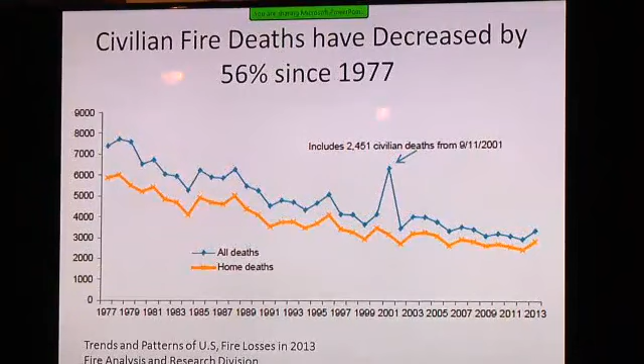What you see on the yellow line on the bottom is where people die in fire. They typically don't die in fires at work, don't typically die in fires when shopping, don't typically die in fires on vacation at a hotel. They typically die in the place where they should feel safest, in their own home. That's where the majority of fire deaths have occurred over time and continue to occur. In fact, it's becoming a larger percentage of all fire deaths as time goes on. So that's really a big focus for us in terms of improving fire safety in the home.

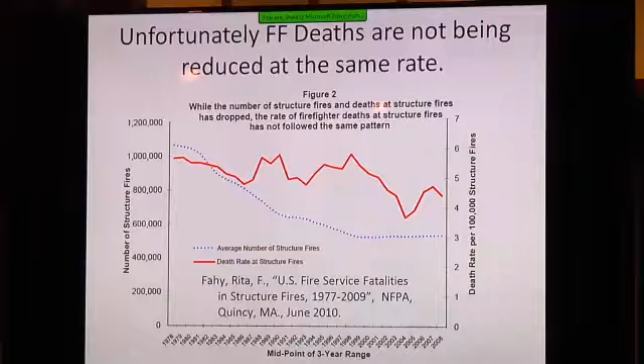Now, we've seen all these curves that are just on a nice reduction, so things are going along fine, but there's one curve that's not reducing at the same rate, and that's firefighter deaths on the fire ground. As you can see, that curve is bucking the trend, and it's a very disturbing trend. According to Dr. Fahy at NFPA, in the late 2000s, firefighters due to traumatic injuries on the fire ground are dying at a rate of 3 deaths per 100,000 fires.

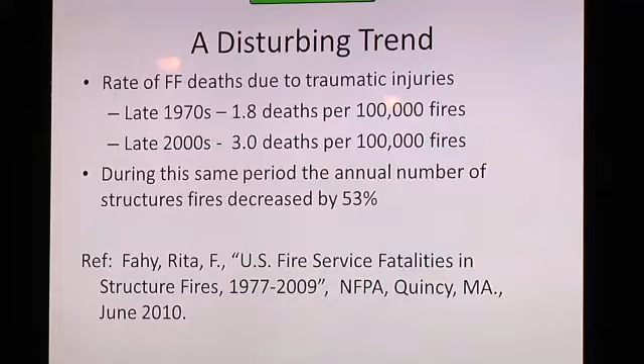Where in the late 70s, when they had less protective equipment and potentially less training, the death rate was lower.

Unfortunately, they also wear very big and heavy boots.

Unfortunately, when you start to put on 30 pounds of gear and carry tools which may add another 10 or 20 pounds to the load, it can affect your balance, your stability, and your ability to crawl around and move. Also, with the SCBA, it may limit your vision as well.

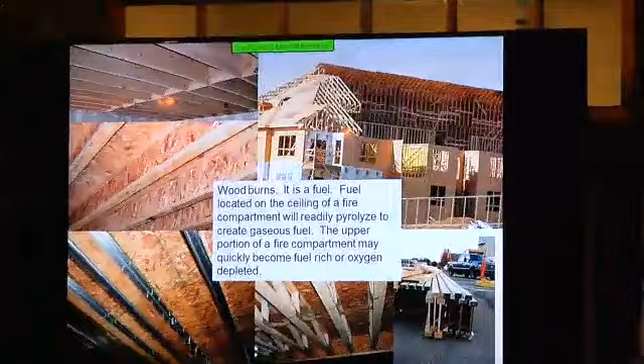The challenge is they don't sprinkler the entire building. So all that attic area that you see in the upper right-hand corner there would have no sprinklers in it. It would be a mechanical space. And we just had an example of what happens with that about a month ago in New Jersey when they burned down a large condominium complex. Once the fire got up in the attic, there's no way the firefighters can stop it.

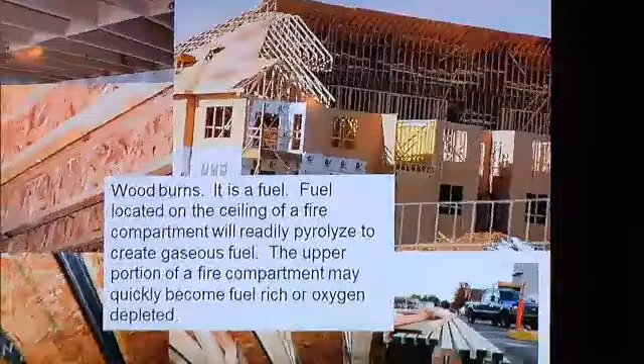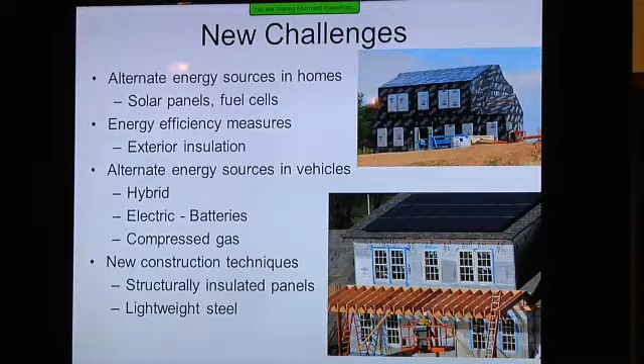And firefighters are getting additional challenges every day. More people are putting solar panels on their roof. They're getting fuel cells in their home. We have all sorts of different power sources for vehicles nowadays, hybrid vehicles, batteries, compressed gas. I understand the hydrogen car is coming, so we'll see. And that can be very exciting as well from a fire perspective.

So in summary, to look at some of the data from our brothers in the Census Bureau, houses in the United States have gotten quite a bit larger on average from the 70s to the 2000s. The housing lots are getting smaller, so these bigger houses are getting closer together. Again, bad news for fire development. During the past 50 years, the fuel loads in our homes have changed dramatically.

They've gone from being where our furniture was principally made of cotton and steel springs, and you needed the steel springs in the cushions because the cotton would kind of bat down. Cotton will smolder. It's fairly easy to ignite, but it burns slowly. Polyurethane foam, which has replaced cotton as the principal foam plastic in our furniture, is extremely resilient. It makes a great seating material. It's hypoallergenic in a sense. So it's a good material until it catches fire.

And then when it catches fire, it has a much higher heat of combustion than the natural materials. It burns with a high amount of soot, so it's a very dirty fire, and it results in fuel-rich conditions within the home very, very quickly. This kind of burning, in simple terms, we say it burns hotter and faster. So what that means is for occupants, you have much less safe time to get out after you hear your smoke alarm. And of course, if you don't have a smoke alarm, you're doomed. As we mentioned, the home designs as well have changed.

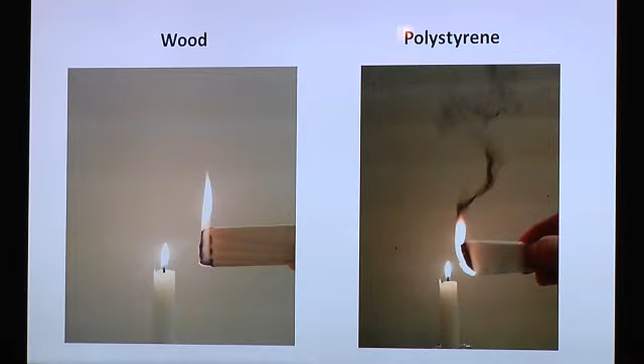Fuels are very different today. If you take a piece of wood and ignite it with a candle, you see that it burns fairly clean and that the flame spread on the wood will be slow relative to, say, a piece of expanded polystyrene where you can see it's a very sooty flame, a very dirty flame, and the flame spread will be very quick.

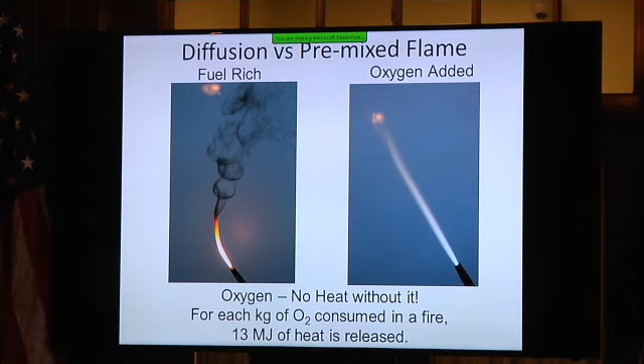So one finding that was developed at NIST in the early 80s was this idea of how much oxygen it takes to generate a certain amount of heat, that it became a constant. It didn't matter if we were burning acetylene or gasoline or cardboard. On average, for every kilogram of oxygen that's consumed, you generate 13 megajoules of heat. So basically, no oxygen, no heat.

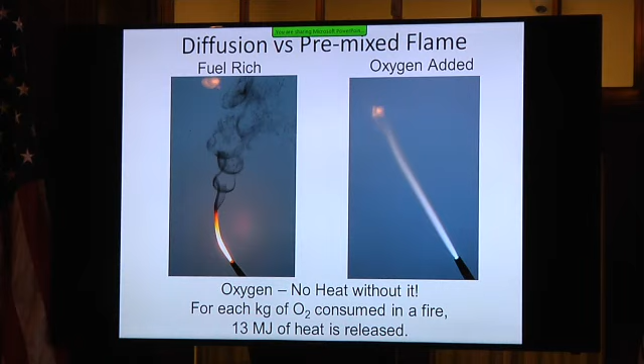Pyrolysis. We mentioned this earlier. It's the chemical decomposition of a compound into one or more substances, basically just due to heat alone. Heat breaks down the material.

So watch what happens. We burn the sofa in our laboratory in Gaithersburg, Maryland, when we put an open flame to one of these sofas. Immediately you see heavy black smoke coming off. Again, an indication that it's excess fuel. In this case, that smoke is going into our calorimeter so we can measure the heat release rate. But in your house, that smoke would be collecting under the ceiling and starting to spread from one room to another. As the foam plastics start to burn and melt, they begin to drip and spread fire down to the floor level.

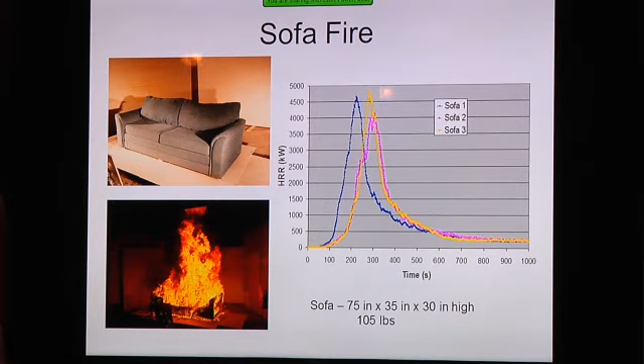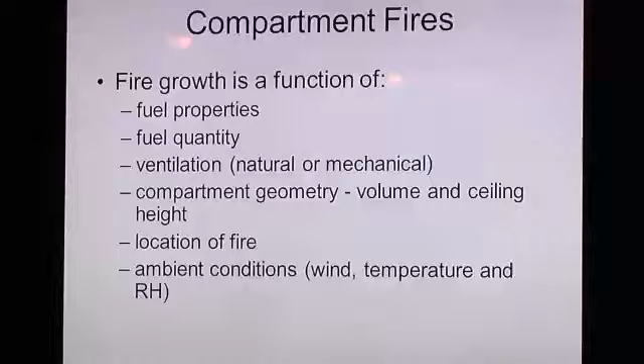So we started to get into compartment fires. And we understand that fire growth is a function of fuel property, quantity, ventilation, but all these things, compartment geometry, location of the fire in the room, and is there any wind? So in a very simple case, again in our lab, we're going to put the friend of the blue sofa, very similar blue sofa, into a small room with an open doorway, and we're going to light it on fire.

If you remember from the previous video, it took about 5.5 to 6 minutes to get that entire sofa involved in flame. Here you're going to see what we refer to as a compartmentation effect. Because the smoke is being held over the sofa and the smoke has heat, it starts to radiate down on the sofa, preheating the sofa for the flame to spread faster. So we'll get more of the sofa involved faster. We'll eventually get enough excess fuel trapped in the room that the gases themselves will ignite remote from the sofa and start to spread through the room and transition into a phenomenon we call flashover. Notice that this is taking place in a little more than 3 minutes.

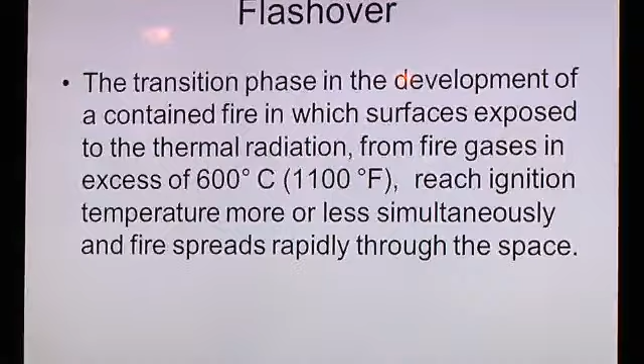So what is flashover? Flashover is the transition phase where we change from having a hot gas layer in the top of the room and a cool, fresh air layer in the bottom of the room to once that hot gas layer auto-ignites, the radiation from it auto-ignites almost everything else in the space. We have a well-mixed reactor basically burning from floor to ceiling in excess of 600 centigrade or 1100 degrees F.

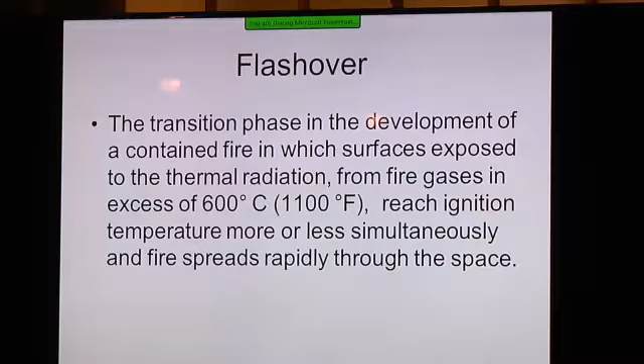So let's look at another flashover. Again, I'm using my friend the blue sofas. And this time we have a dry Christmas tree. So that's a natural fuel, right? There's no synthetics in the dry Christmas tree. And what you'll see is that even that fuel will generate a fuel-rich condition. Heavy black smoke will start to come out of the tree. It's not mixing well enough to get it burned. And you'll see the fire triangle right in front of your eyes as the flames burn at the interface of the hot fuel gases and where it's mixing with oxygen as those hot gases are moving across the room.

Now we're going to see a very clear example of pyrolysis. The radiant energy from the flames are now heating the sofa and the chair to such a point that the polyester is turning into a white fuel vapor, and that's going up into the hot gas layer, again, which will mix and burn at a later time once the concentration is right and once we have enough oxygen. Again, look at the speed with which this is developing.

We had a tragic case in Annapolis, again last month, where 2 grandparents and their grandchildren were killed. They had a huge tree in a very large home, a 15-foot tree. NIST burned some 15-foot trees for the wildland-urban interface study. A dry tree like that can generate 30 megawatts of energy, or the equivalent of about 6 sofas going from 0 to maximum in a matter of seconds.

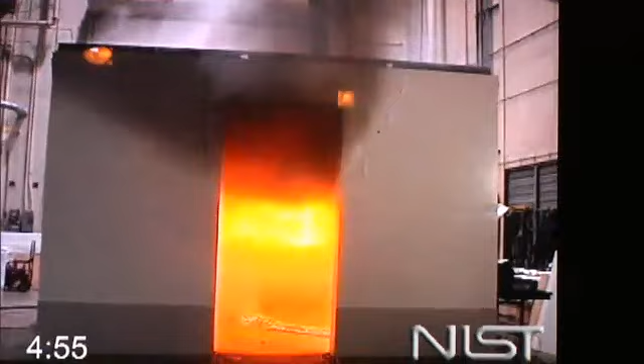Our high-pressure plastic laminate on our countertops is now bubbling and popping and pyrolyzing. And now you see that we're starting to get some ghosting flames, or intermittent flames, in the hot gas layer as it starts to move toward the open vent, the door. So now we'll take a look at the door and watch the vinyl flooring pyrolyze, auto-ignite, and quickly we transition to flashover.

So how do firefighters interact with this? Well, again, we discussed that they have some very good protective equipment, but their face piece is made of a plastic. It's an industrial plastic, a high-temperature plastic, but it's still plastic, and it melts at a relatively low temperature relative to the heat generated by the fire. Flame temperatures can be anywhere from 1,400 degrees to 2,000 degrees.

And once that face piece reaches 280 or 300 degrees, it starts to soften. And then it will be liquid pretty much by the time it's 400 degrees or so.

Other equipment that firefighters carry into the space for their own safety, such as radios — there's currently no standard for firefighter radios in terms of how much heat they're required to take. So many of the devices they carry in with them currently could melt at 140 degrees, or certainly less than 200 degrees, and fail them, where their gear is designed to take more energy than that.

So we're testing all these things, trying to work with the appropriate standards development organizations to improve the products and materials that the fire service has. But in the meantime, we want to make sure that the fire service at least knows what the limitations of this gear are.

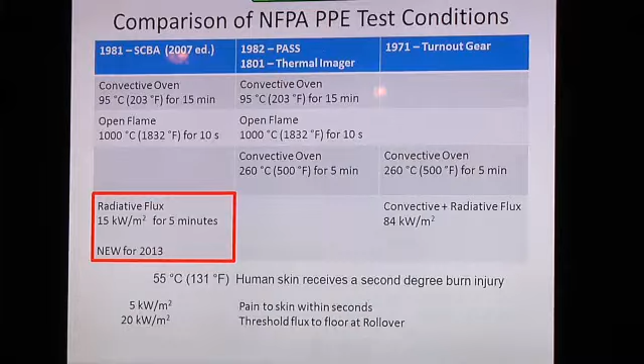If we look at a comparison of current standards for turnout gear, personal alert safety systems (the PASS device), thermal imagers, and things like that, we see they're all tested to at least 500 degrees — everything except the SCBA, the self-contained breathing apparatus. The reason is the plastic face piece cannot take 500 degrees.

The new standard that came out in 2013, based on work done at NIST, now exposes it to a radiative heat flux of 15 kilowatts per meter squared for about 5 minutes. The idea is that it may still soften and develop a hole, but the breathing mannequin has to maintain a positive pressure seal for 24 minutes afterwards to provide time for someone to rescue the firefighter. So it needs to be combined with firefighter training, so they know not to touch the face piece because it's so soft they need to leave it in place.

Just to give you some references for all these temperatures and heat fluxes: human skin at about 130 degrees has the potential for a second-degree burn injury — in other words, it starts to blister. Pain to exposed skin occurs at about 5 kilowatts per meter squared, and that happens within seconds. The threshold for rollover, as we transition toward flashover, is about 20 kilowatts per meter squared. When flames are actually impinging on things, it's anywhere from 160 to 200 kilowatts per meter squared.

Firefighters are a traditional bunch. They're good folks, and every community in America is fortunate to have a fire department they can rely on when they're in trouble, almost any kind of trouble. Fire departments nowadays are pretty much all-hazard, whether it's auto accidents, hazmat, or responding to a terrorist incident. It's not just all about fire anymore, but they still need to be prepared for the fire when it occurs.

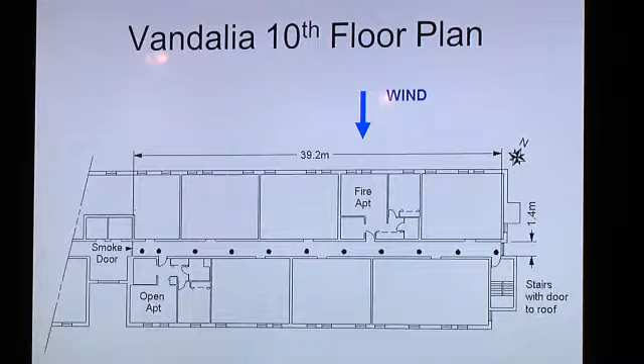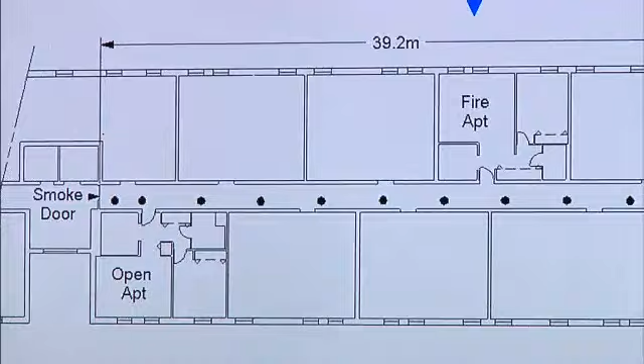In the open apartment on the lower left-hand corner, a gentleman was getting smoke in his apartment, so he opened his windows to try to let some of the smoke out. Unfortunately, because he was on the low-pressure side, the downwind side, the intensity of the smoke coming into his apartment increased. Then he opened the door to his apartment and could not get out due to the high amount of smoke.

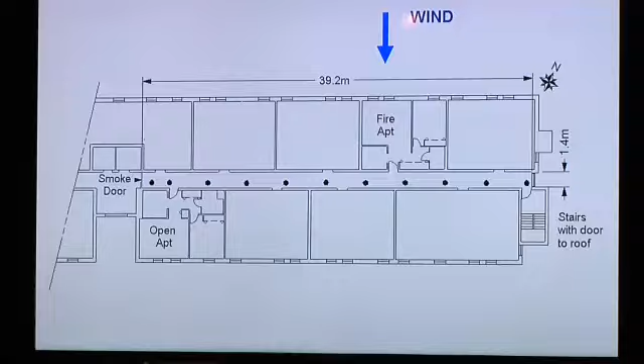So he went back in his bedroom, closed the door, and safely rode out the fire. Lieutenant Cavalieri, Firefighter Bohan, and Firefighter Bopp went through the smoke door from the elevator lobby. They were approaching the fire apartment and basically got caught between the fire apartment and the open apartment. They were in what we call the flow path. Once the windows in the fire apartment failed and a wind-driven fire occurred, a very high-intensity fire in that apartment, the heat dropped them where they stood and they died.

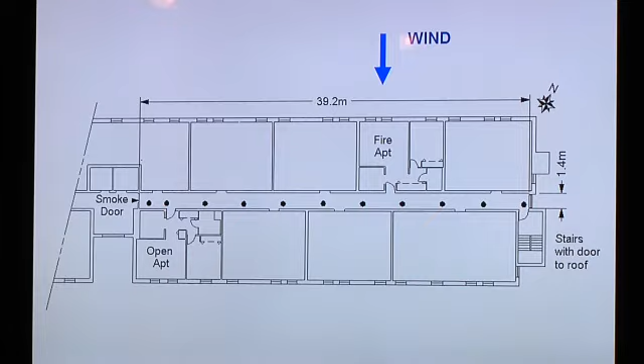This is an image of the corridor going from the fire apartment looking to the attack stair where the rescuers were coming, trying to respond to their mayday. This is what was left of the fire apartment itself. You can see it was hot enough to spall the concrete beams that composed the ceiling.

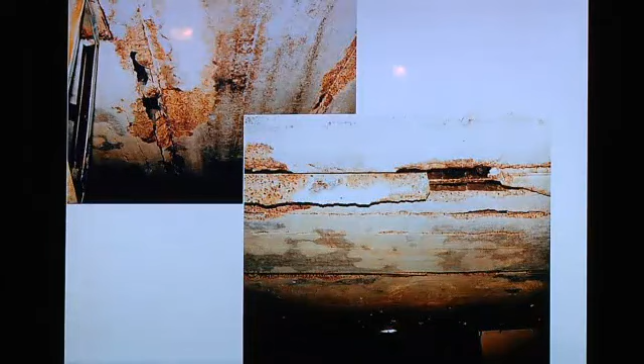The Fire Dynamics Simulator, which wasn't even called that at this time, was very rough and in draft stage. It wasn't officially released till 2000. It was used to get a sense of what might have occurred in this fire. So you can see the little flicks of orange as the fire's developing in the fire apartment.

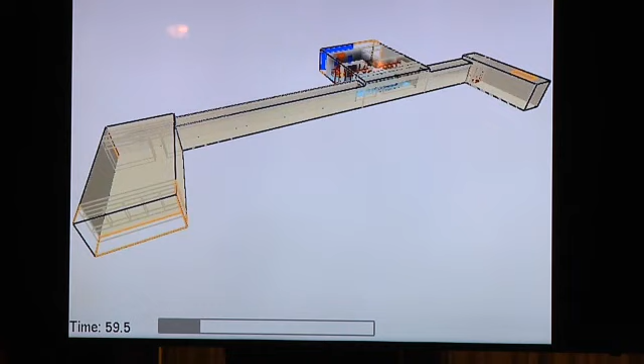And then we have smoke that's going to start as the fire increases in intensity. The smoke's going to pour out through the open door into the corridor. We see it flowing into the open apartment. And then we're going to see the impact of the window failing, and we'll see a surge of smoke and flame pushing down the corridor.

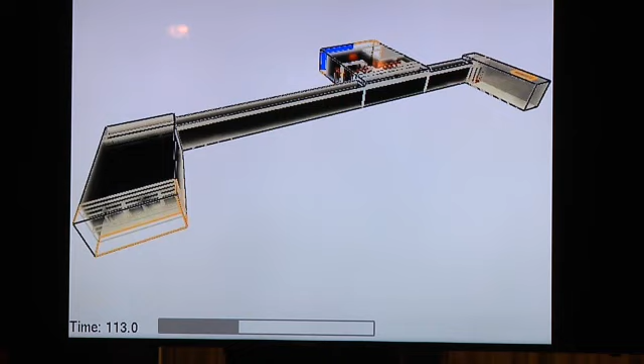As the firefighters radioed their mayday, the other firefighters in the attack stair opened that door, and then you'll see that once they opened that door and it vented through that yellow vent on the top, the bulkhead vent of the stair, that flame also came in and burned them and slowed down their ability to get to the original victims.

It took about 10 years to get the funding together, to get the partnerships together, and to really take a look at this by burning actual experiments instead of just looking at the fire model.

There's a hollow core door that's installed in the target room that's in between the bedroom and the living room, so we call that our target room. Somebody could be safe there for a while, and we'll take a look at that.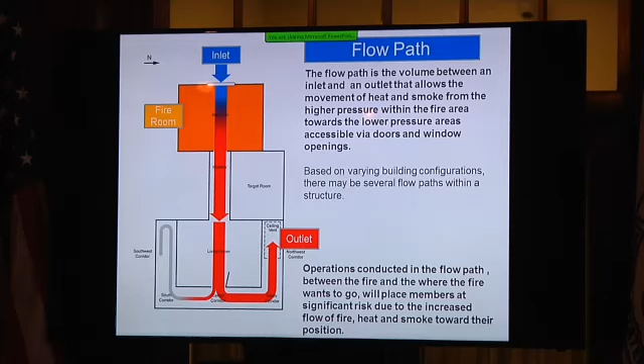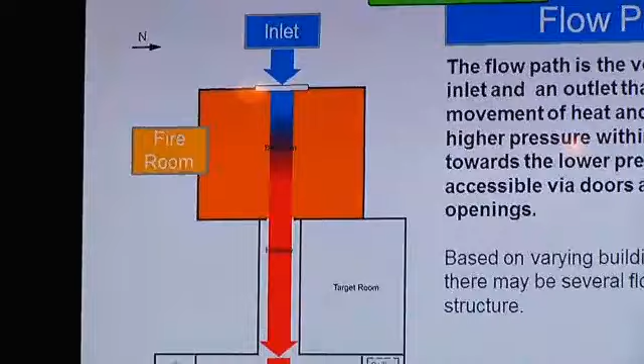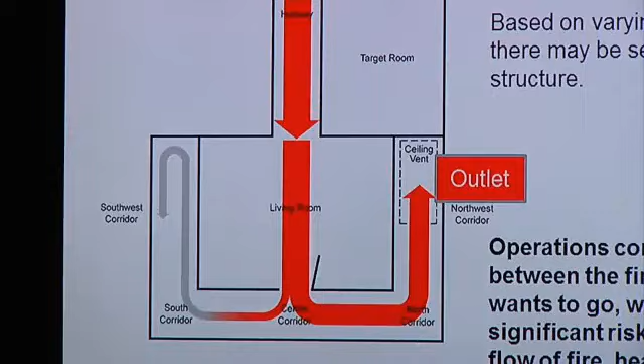The flow path is basically composed of the volume, or the rooms and the hallway, and then what direction the flow goes and where it goes is controlled by the inlets and outlets. So in this case, the high pressure area is going to be in the bedroom, and flow always goes from high pressure to low pressure, and the lower pressure path is through the living room and out the vent. It's pretty clear just by the colors I drew in the flow path that the higher hazard area for firefighters to be operating in is toward the outlet side, on the exhaust side, between where the fire is and where the fire wants to go.

So we prepare these rooms just as you'd find in anybody's home, with real fuel, real synthetic fuels. We measure the heat release rates of them so we have an idea of what the hazard is. So you get some idea at the peak heat release rate that a small upholstered chair is almost 2 megawatts and the sofa is about 2.5 megawatts.

It's sort of a love seat size sofa, and the bed, king size bed, there is 4 megawatts. We start the fires with the little waste container, and that's about 30 kilowatts.

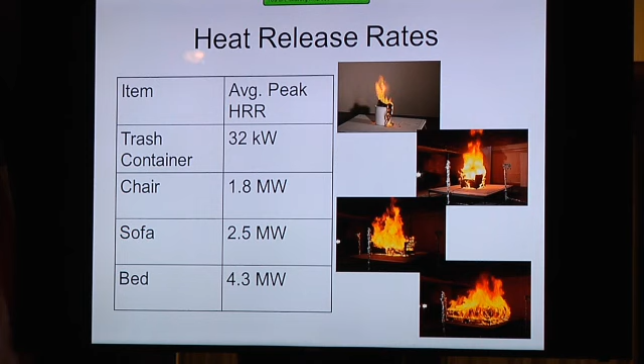The first test we did is a baseline test, and it has absolutely no wind supplied to it at all. So all the movement you're going to see is a function of the fire acting as a pump, entraining fresh air in, heating the gases up, causing them to expand, increasing the pressure in the fire room, and then pushing out to lower pressure areas through vents.

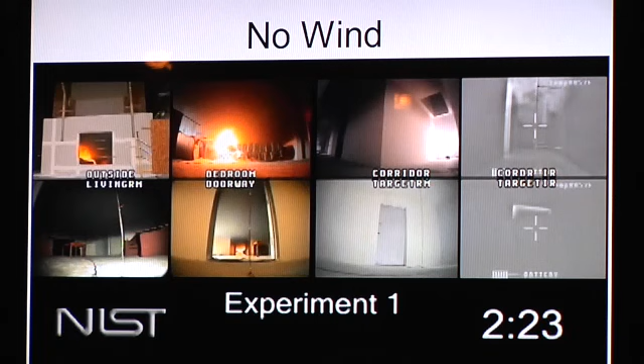So the fire started next to the bed. On the upper left-hand side, you'll see the view of the window that's still intact. Once we break that window, or once that window fails due to the fire, you'll see a dramatic change throughout the space. Currently, smoke is now spreading through the hallway, into the living room that we see on the left-hand side lower frame. And we see in the thermal imager view on the upper right-hand side the amount of heat that's now pouring out into the corridor and moving toward the vent.

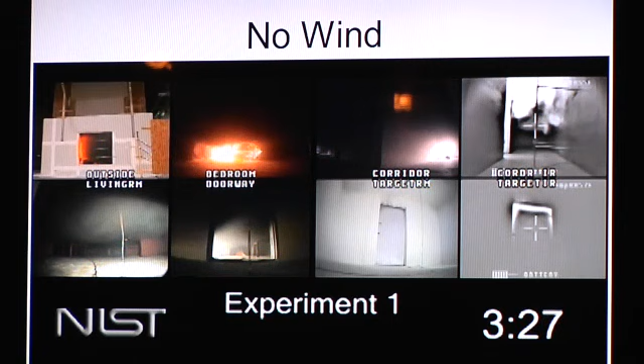If firefighters were in there currently and they were crawling, they would be safe. Their gear could protect them from that thermal load. But once the window gets vented, everything changes, and it changes within seconds.

So now we have a situation that if firefighters were in the corridor, they would be exposed to untenable conditions. Within 30 seconds or less, they would have to either change that environment or find a different place to be if they hope to survive. Notice that at this point in time, the target room is still clear while all the other rooms are full of black smoke. The door to the target room starts to fail at about 6 minutes.

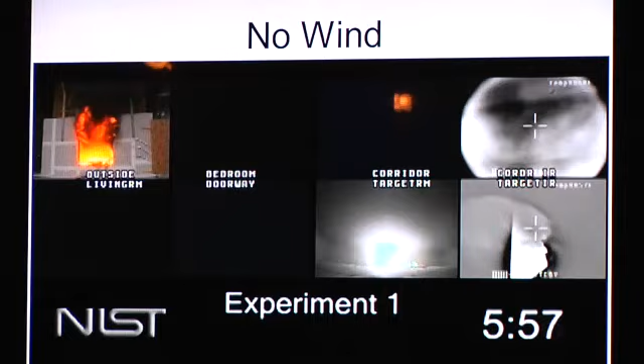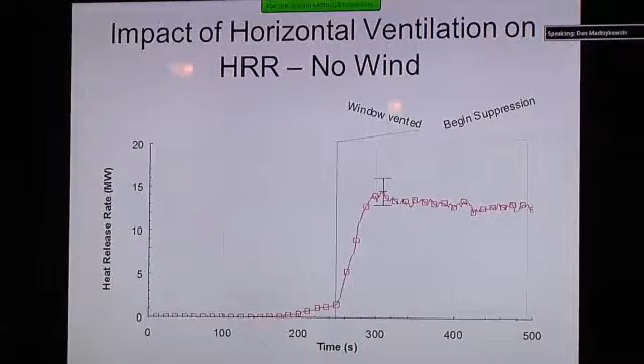So what's the impact on the heat release rate, the amount of energy that the fire is producing? Well, once we vent the window, it goes from 2 megawatts to more than 12 megawatts. The bedroom temperatures you see range from about 1,200 degrees Fahrenheit near the ceiling to about 500 degrees Fahrenheit near the floor. That all happens in less than 4 minutes, clearly untenable for an unprotected civilian.

Once the window's vented, notice how we transition to flashover where we have well-mixed burning. Floor to ceiling, the temperatures all increase and they're all over 1,100 degrees Fahrenheit.

What about in the living room? So let's say a firefighter was working pretty fast. They wanted to see if they could effect a rescue. They're working their way back to the fire room in that apartment. They're in the living room, and then that window fails.

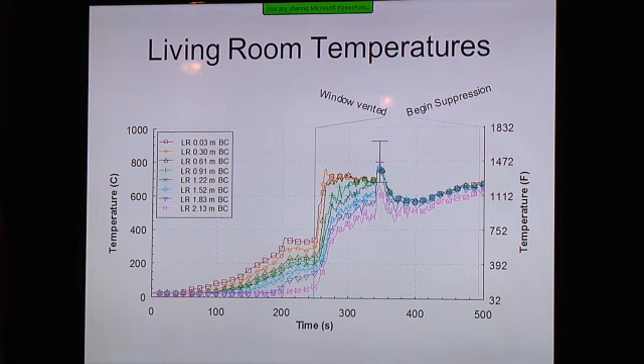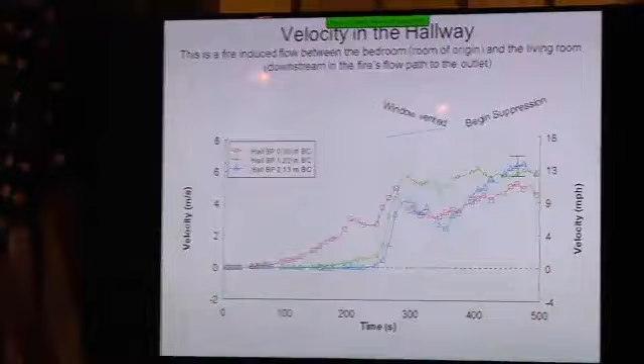Anyone that's bought an electric oven lately, if you go in to buy an electric oven, they're going to sell you what type of oven? A convection oven. The only difference between the old school oven with the heating element and the convection oven is the convection oven has a fan to increase the velocity of the hot gas moving around the turkey. What's the purpose of that? To cook the turkey faster. Unfortunately, high velocity hot gases take away the firefighter's safe time much faster.

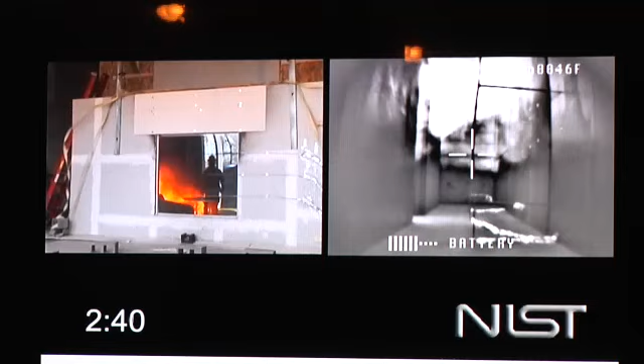If we give it more air, that's fuel that's ready to burn. Here's a case where we actually impose a wind on it. So again, you're looking at the inlet, which is where the glass is, and the exit into the public corridor, which is where the open door from the apartment is. Once the glass fails, it's exposed to a 20-mile-an-hour wind pushing through that apartment.

This is playing in real time, and again, watch how rapidly conditions for firefighters would change, going from tenable for firefighters crawling in that corridor to untenable within seconds.

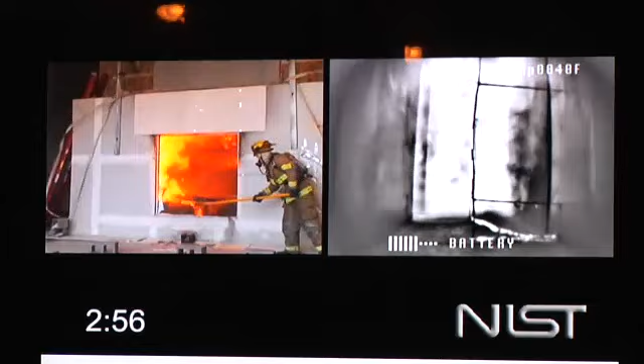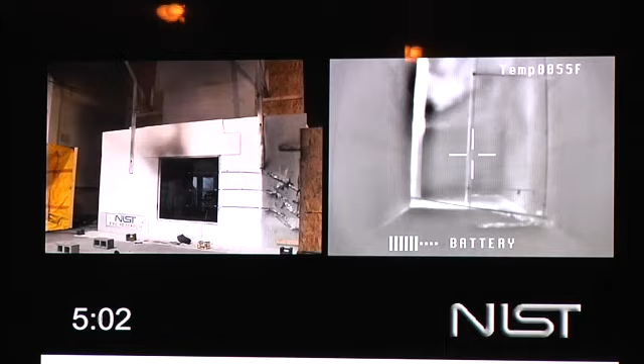How do you control it? Well, you don't want to give it an inlet or outlet. You have to control the flow path. One way of doing it is keeping the door closed. So in this case, even though the window's vented, the door to the corridor is closed. You can sort of see a steel rod in the image that we welded to the door so that we could open it safely without having to put firefighters inside that potentially lethal environment.

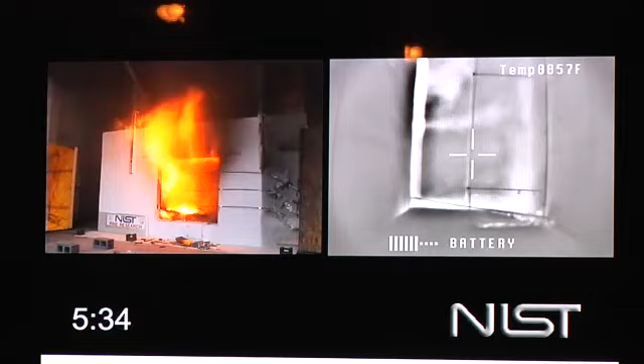So again, things for firefighters to look for: what's the wind outside? Can you see with the thermal imager smoke pushing with high amount of energy around the door? Can you feel energy coming around the door? In which case, don't line up in front of that door and open it, back out. Because if you line your crew up to make the push, that's what they're going to be assaulted with.

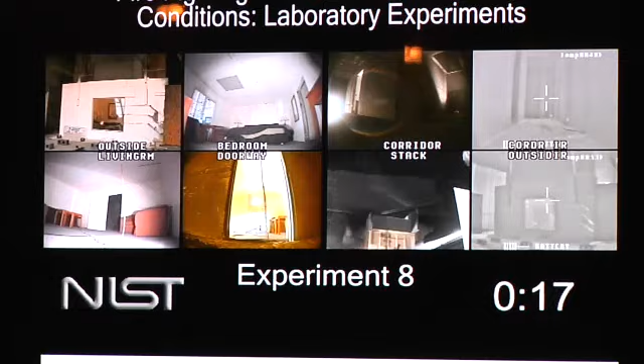Last one of the lab experiments. And this one's a good one because it actually happened to us, the phenomena that we're looking at here happened to us in experiment 3. It wasn't exactly part of the plan. It was just sort of something that occurred.

What had happened was that we generated so much excess fuel that it resided in our 40-foot by 30-foot hood with a 6-foot ventilation duct pulling 90,000 SCFM. Enough smoke sat there that it auto-ignited. And now that exposed the top of our test prop in the lab to a lot of radiation.

We said, well, that was pretty interesting. Let's see if we can do that again and be ready for it so we can get a good video of it, get some good pictures. And also we want to see what the impact of putting a hose line through the window would be on this flaming that's going all the way from one end of the apartment, through the apartment, and up into our hood. So now as we watch the stack video view, which is in the middle there on the bottom, we're going to start to see flames coming out of that.

And they're going to pulse up and down for a while. Now we've auto-ignited the gases that are in our hood, our 30 by 40-foot hood, and now we're going to flow about 80 gallons per minute of water, a low amount of water in firefighting terms, into the bedroom. And you notice what happened: the fire went away in the stack immediately.

And you might look and say, well, wait a minute, we still have flames in the bedroom. But as we get our view back in the bedroom camera, the second one from the left on top, we'll see that we just have a bunch of debris fires basically going in there - what's left of the bed, what's left of some chairs and dressers and things like that. These are fires that firefighters' turnout gear are easily designed to withstand the energy and the heat from, and go in and fight that fire.

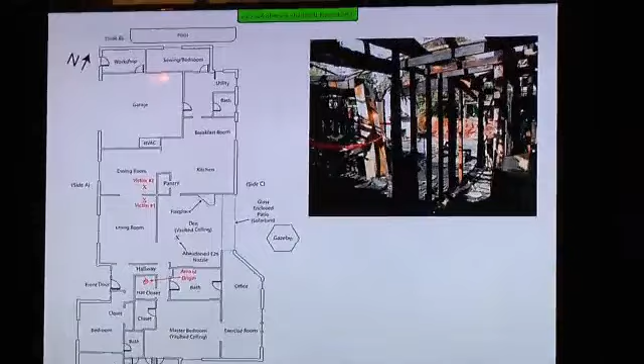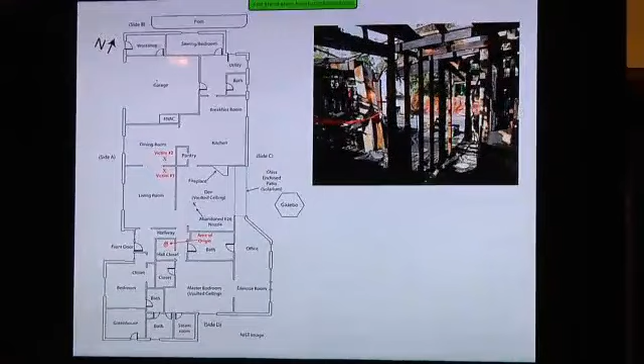In this case, 2 firefighters in Houston died. We were asked to come down to look at the fire behavior and model it. The victims went in the front door, which was the downwind side, the low pressure side. They made it to the back of the house. That's where their nozzle was found. And then their bodies were found in the front of the house, as you can see in the living room and the dining room. The fire started in the attic. It was well involved before the fire department arrived.

They had at least 20-mile-an-hour winds coming from the rear of the structure, and you can see that's where most of the burn damage is. Where the people are standing down there in the image, that's where the front door is, where the firefighters made entry. The occupants had also opened the garage door because they were rescuing their cars.

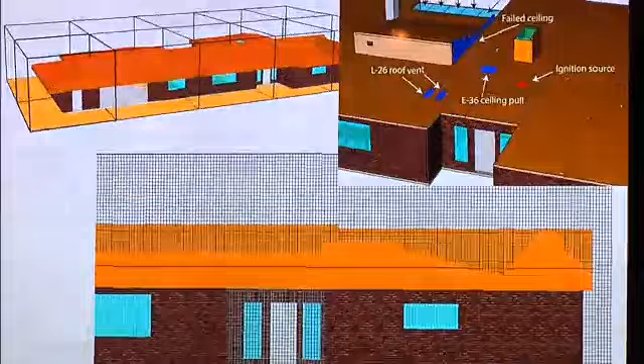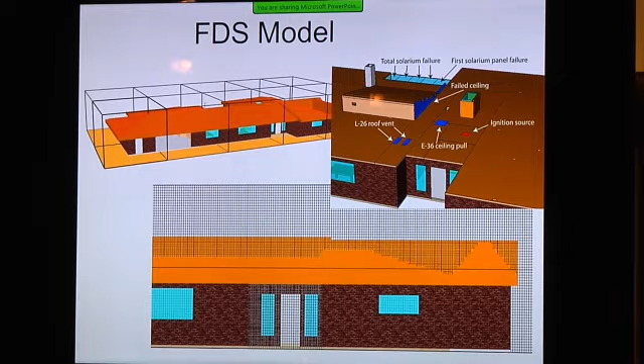We made, again, a fire dynamics simulator model. What we put into the model is not only the geometry and the thermal and chemical properties of the fuels that are there, but also the timeline of what the firefighters' actions were. So you can see where we have little blue marks where ladder 26 made roof vents. We have another blue vent mark there just behind the front door where engine 36 was pulling the ceiling and things like that. The big feature that happened here were the windows on the back side of the house failed.

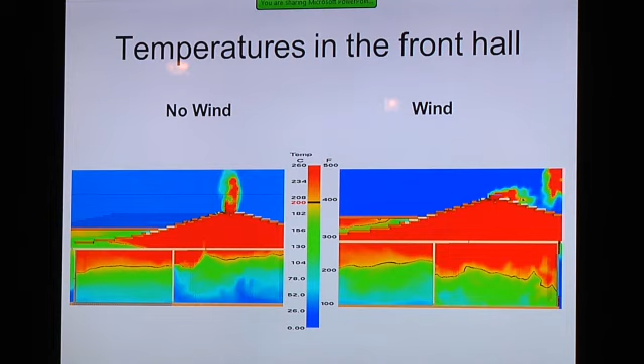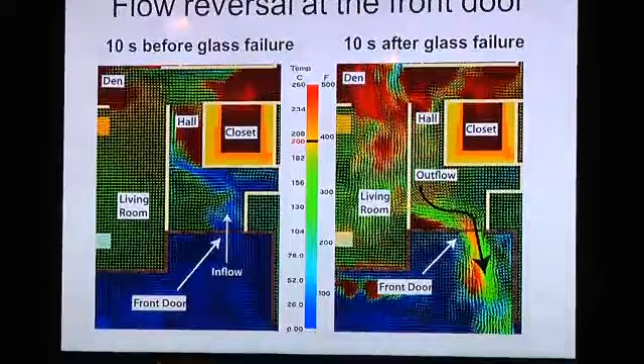When there was no wind, you can see that the blue, the cooler color, when we look at a cross-section of the house, was lifted, so the firefighters have refuge closer to the floor. Once the wind penetrated the house, it mixed, the fire got hotter, and dropped the heat all to the floor. Just looking at it from the top down at the front floor view, 10 seconds before the glass failed, it was relatively safe for firefighters to crawl in there and make an attack. Within 10 seconds after the glass failed, it was untenable thermal conditions blowing out the front door.

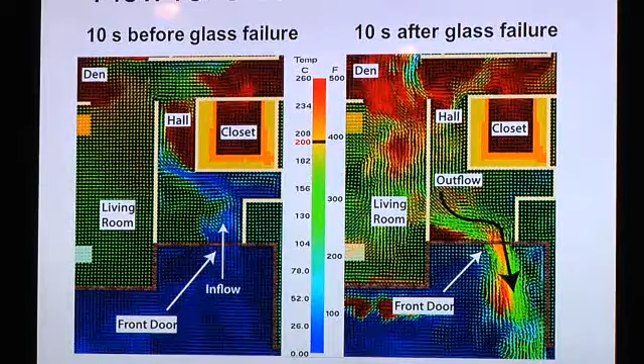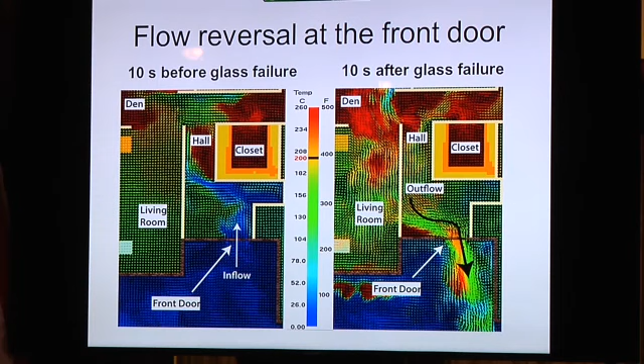So as a fire officer, if you're ignoring the wind and you send a crew in on the downwind side, effectively you're taking a chance, you're flipping the coin as to whether they live or die based on whether a piece of glass less than 1/4 of an inch breaks or not. And again, here's another image showing the flow path where the intense heat is and how the firefighters got to a cooler place, but not cool enough for them to survive.

If more oxygen is introduced to these hot fire gases that are stored in our well-insulated homes, the fire can reach fully developed stage in as little as 30 seconds to 80 seconds, 200 seconds, depending on the size of the box, the size of the house. So this has happened to firefighters many times. So let's look at an example.

Again, working with the Chicago Fire Department, we had the luxury of burning 20 identical townhouses. I'm only going to show you one.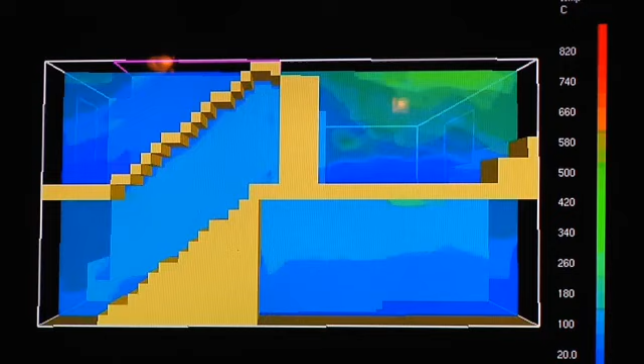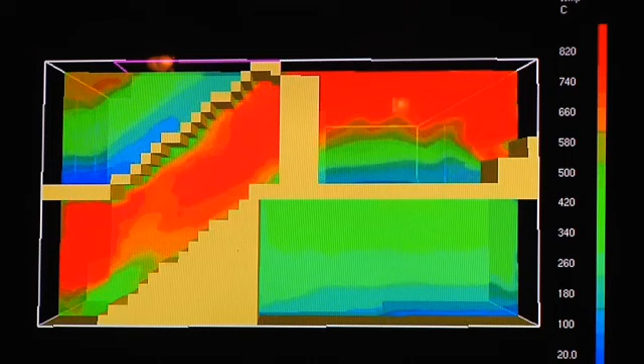The fire started in the basement. When the fire department got there, all they saw was smoke. Once the basement was ventilated, it flashed over the basement. High momentum, high velocity, hot gases start coming up the stairs and impacted the two firefighters, and they both died. There was a third firefighter there that received burns over 65% of his body, but he survived to sort of tell us his experience.

So these phenomena happen again and again. Funerals are held. But not a lot of change was going on in the fire service in terms of we need to do something different. The leadership of the FDNY, the fire department of the city of New York, said, no, we really need to do something different.

They met with their firefighters. They have 11,000 firefighters. They had focus groups. They said, what's it going to take for us to get a better understanding of this? And they said, we need to make sure that the victims are safe. We need to make sure that we're doing the best thing for victims, not just the best thing for our safety. And so that's why these experiments were set up on Governor's Island.

We conducted these in conjunction with Underwriters Laboratories. And again, old abandoned federal property that they left in very nice shape for us. It used to be a Coast Guard training base. We had a lot of very similar structures. We could look at the upstairs bedrooms and monitor them for gas concentrations as well as temperatures to look at how victims would be affected.

Again, we're using real fuels. The places were left in wonderful condition for us with the wood cabinets, nice carpeting and everything. We just had to add the beautiful furniture. I hope you enjoy the mauves and the purples there. You know, we got a good price on it.

We put a lot of furniture in the basement for the basement fires as well, but a lot of the fuel in an unfinished basement is really in the floor assembly itself, the exposed wood at the ceiling. Again, if you look at your furniture at home, you'll see very similar warnings. You know, be careful, don't have this near open flame, et cetera, et cetera.

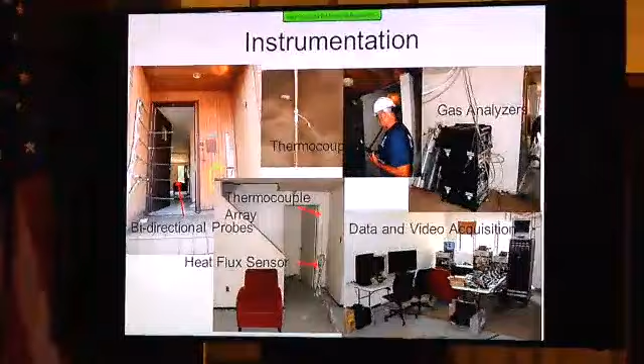And being as how I'm from NIST and the main point of our business is measurement, I had to include a slide there to give you an idea of some of the instrumentation that we put in these structures. Bidirectional probes measure both the temperature and the pressure so we can get the velocity of the hot gases, whether they're coming out of the door or the cool gases going in the door, or how that changes over time with the fire.

Thermocouples, we put hundreds of thermocouples throughout the house so we can see the thermal gradient, the temperatures from the ceiling down to the floor in the various rooms in the house and the hallways and whatnot. We have our gas analysis equipment so we can understand the tenability of victims. Typically, folks in residential fires die due to smoke before they would get burned to death or something like that, so it's important to monitor that.

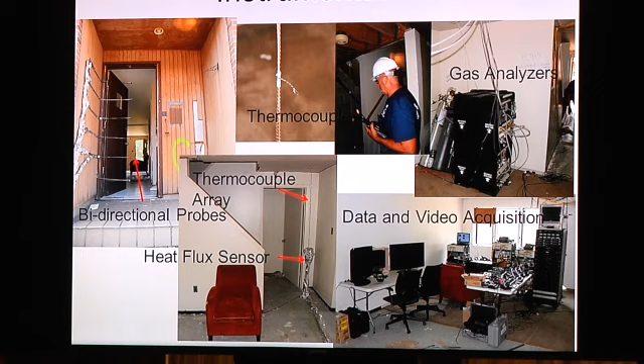And then again, we run miles of video cable and data, because that's how we're getting this information out to teach people, to show them what's actually going on in the house. So here's a fairly simple case where in the past folks were hesitant to put water in a basement window. They would go inside and try to force their way down the basement. And the reason was that they thought they would push fire, they thought that they would make conditions worse, they might steam somebody inside.

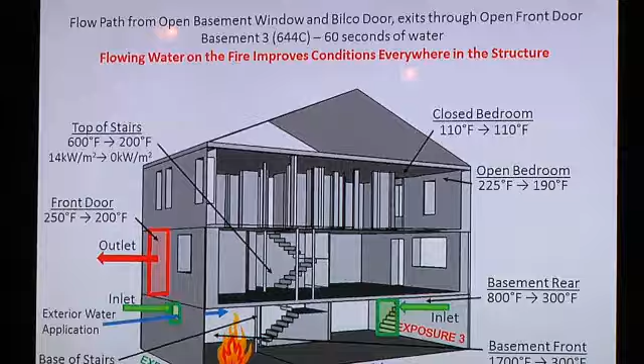So water through the basement window: here's how we're trying to share the data instead of in the form of graphs. A simple graphic that shows once we introduce water into the window for about 60 seconds, the temperature in the basement in the front went from 1700 F down to 300 F near the ceiling.

At the top of the stairs near the ceiling, it went from 600 degrees Fahrenheit to 200 degrees Fahrenheit, and the heat flux dropped from 14 kilowatts per meter squared to 0. Even in the open bedroom remote upstairs, the temperature dropped from 225 to 190. So it made conditions throughout the structure better.

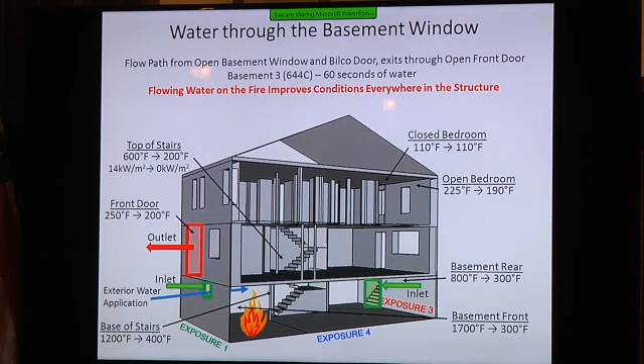If we had more time, I could show you graphics where we put water in the front door, water in the second story window, move the fire all around the house, and we get very similar results. This is one of the more recent simulations we've completed in my group at NIST. There's a nice narrated version, about 10 or 11 minutes long, on YouTube. Just go to the NIST YouTube channel and find it on the fire playlist.

So it happened June 2nd, 2011. This incident brings a lot of things together. It brings the equipment, the failures of the equipment, the failures of the radios. This occurred to these firefighters. It appears that their bottles may have heated and they may have ingested hot air from the bottles, possibly. We're still doing some research on that.

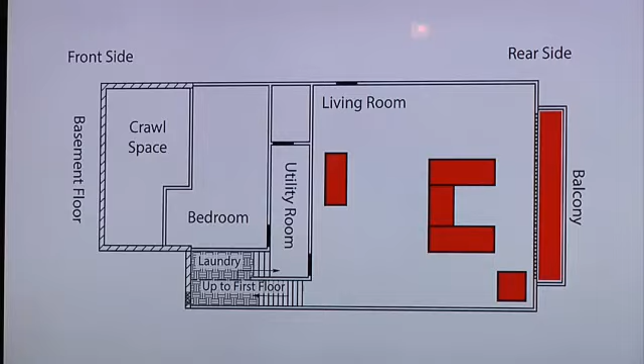It talks about flow paths and appropriate fire attack. You can see this house is on a nice hillside in San Francisco, two stories on the front, several stories on the rear. The fire starts in a lower level on the rear. They call these their upside-down houses. The living room is in the basement, the street level has the bedrooms, and the upstairs level has the kitchen and dining room. The fire starts near the sectional sofa in the living room.

The victims are on the street level. They're there with their hose line to protect the stair. Their hose was charged, but they never seemed to flow it. Between the time an officer talked to them, conditions were fine, not hot, just a little smoky, and he left. As soon as that officer left the house, he noticed conditions dramatically changed. The reason they changed was because the windows failed on the living room level, the lower level, and that level flashed over. The windows were only held in with vinyl frames, no steel or wood frame supports, so once they started to fail, the entire wall of windows failed within 2 minutes.

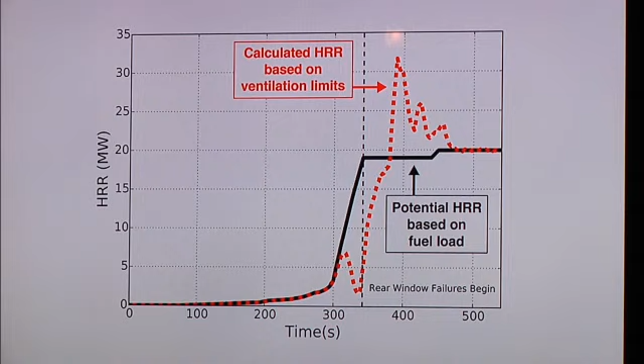Our model shows things like how much energy we can get out of this fire. From the heat release rate, we had a potential of about 20 megawatts of energy with all the furniture, carpeting, and everything downstairs. However, notice by the red dotted line that due to the oxygen limitation, we're only getting about 6 megawatts out of that fuel package until the windows failed. Once the windows failed, we shoot up to more than 30 megawatts. Wait a minute, we only started off with a potential of 20 megawatts—where did this other fuel come from? It came from the accumulated fire gases that were held in the structure. That's the hazard the firefighters need to mitigate.

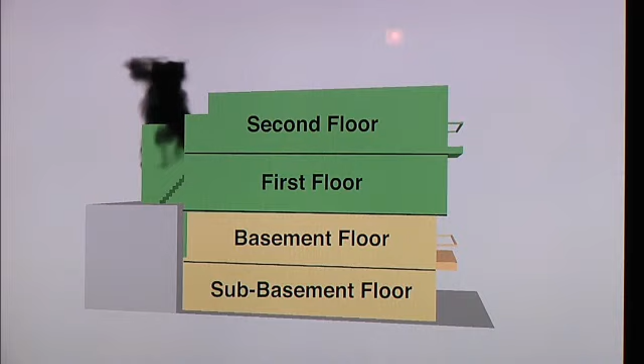So here's a view of the model. As you can see, it's advanced quite a bit since we first modeled Cherry Road years ago. We start to see the smoke from the front of the house. Here we'll get some definitions. Remember, the fire's on the basement floor, and the firefighters who died are on the first floor.

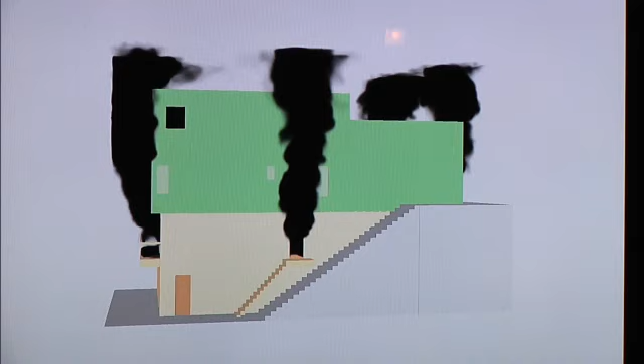As the fire intensifies and the windows fail, they continue very quickly to fail across the back of the structure. This doorway on the side of the structure at the fire level is where they ultimately successfully attack the fire. Part of the tactics and consideration is, if you size up this house and determine that the fire would be beneath you, don't put your firefighters in the chimney, don't put them above the fire—make your initial attack on the same level as the fire.

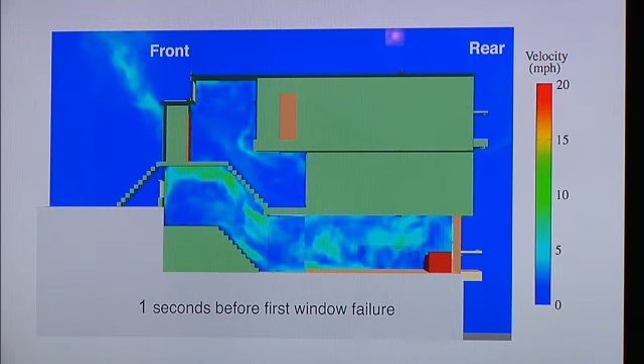We talk about heat transfer rates, and it's a function of not only the energy but also the velocity. The firefighters are at the bottom of the stairs at street level. It's currently blue, meaning about 0 velocity, but after the windows fail, we clearly get about 10 miles an hour of movement, and that's even with the flames venting out the rear of the structure.

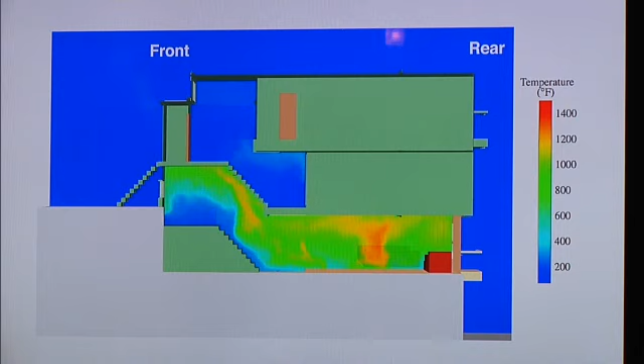We also look at the increase in temperature, which is another part of the hazard. Before the windows failed, they were 200 degrees F or below; after the windows failed, we can see they're between 800 and 1200 degrees in the area where they were located—well above what any of their gear can take.

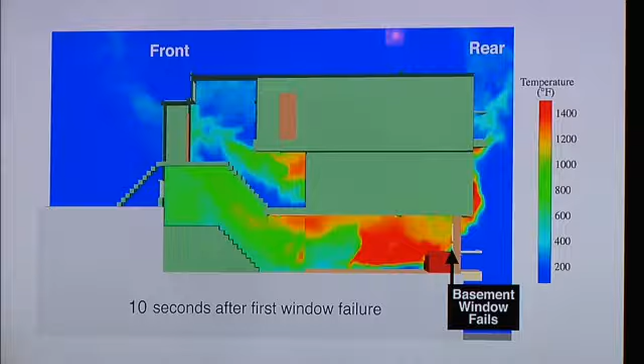We don't only work with large cities and towns. We had a great opportunity to work with the State Fire Marshal's office down in South Carolina and a number of the departments in South Carolina. The burns were actually conducted with the Spartanburg Fire Department.

What we try to show with these burns is different ways, different alternate means of attacking a fire. In this case, this is somewhat of a traditional means of attack.

Interestingly enough, most of the construction in single-family homes has no fire rating whatsoever. The floors aren't rated, the walls aren't rated, the ceilings aren't rated. The only exception to that in most parts of the country is if you have an attached garage, that wall has to be fire rated and that door has to be fire rated. So in this particular case, using this tactic, the firefighters are going in the structure and basically disabling a fire protection device to fight the fire.

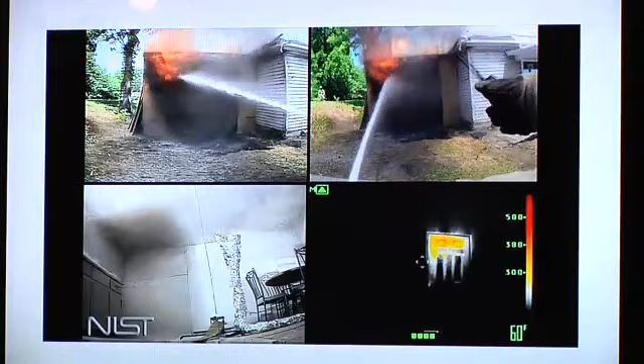Notice as soon as the stream gets into the upper layer where most of the hot gases are, the fire goes out immediately. Now they can move in closer, continue to knock down the fire. Notice the condition of the kitchen. Fire door's holding, the kitchen's in very good shape.

To be fair, the fire service has reason to be concerned about exterior attack. They say, you know, Dan, we've seen fire being pushed. I've had fire being pushed on me because part of it is you need to use the appropriate tools and the appropriate tactics. So what we have in this building are 2 rooms that are on fire upstairs.

If you look at the lower level views, video on the left and IR on the right, we're looking at the small hallway that's about 4 feet that connects those 2 rooms. The hallway has combustible finish inside, which is why it's burning. In the room that we just attacked with a straight stream, 150 gallons a minute, we're maximizing the amount of water that's getting in the room. We're minimizing the amount of extra air being entrained in the room, and most importantly, we're leaving that vent open so smoke and heat can come out of it, and as a result, you didn't see much change at the top of the hallway.

Now we're going to do something bad. Watch the impact. Right? There's your pushing fire. Pushed it down the stairs.

We took a fog nozzle and we covered the vent. So now we have a high pressure vent instead of a low pressure vent. High pressure flows to low pressure. We minimized the amount of water that got in there, so the little bit of water that got in there converted to steam. It was very inefficient. And using a fog nozzle like that is the same as putting a fan in front of that window. You're entraining a tremendous amount of air. So you're making the fire bigger, you're pushing it in one direction, and you see the result.